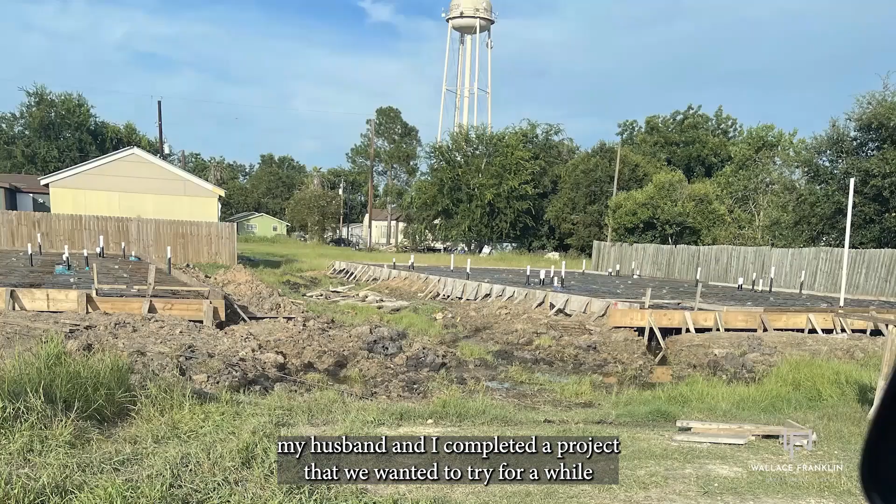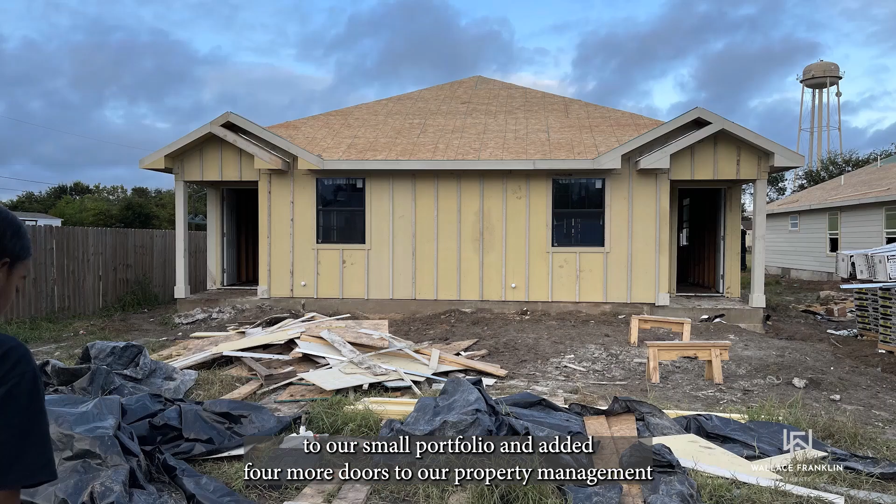In March 2022, my husband and I completed a project that we wanted to try for a while, to build rental properties from the ground up. We built 2 duplexes, and it was a great addition to our small portfolio and added 4 more doors to our property management responsibilities, something I didn't fully understand the implications of when we initiated the project, but I digress.

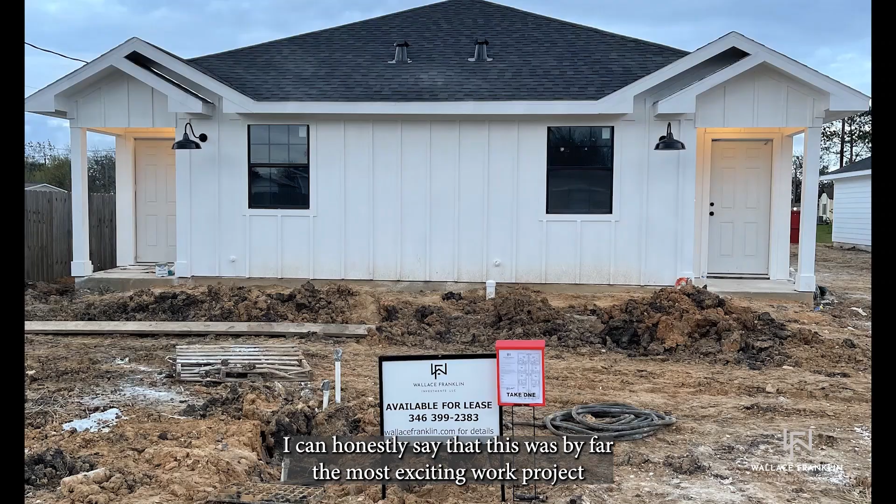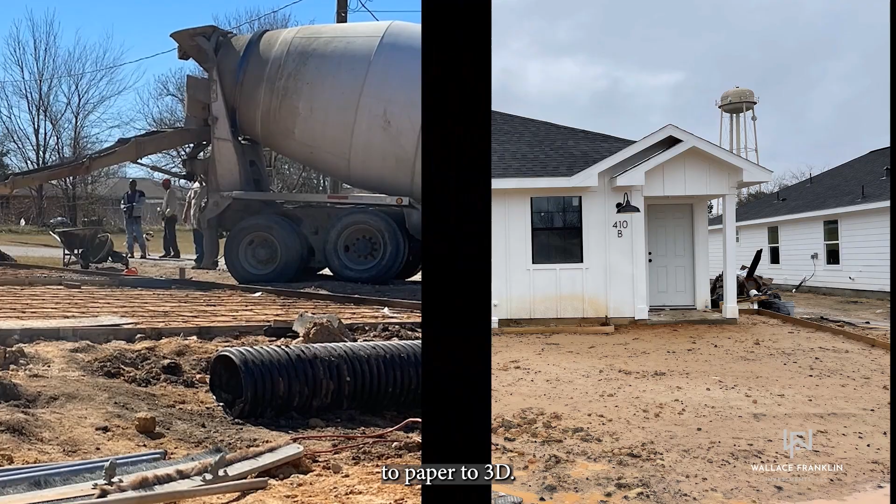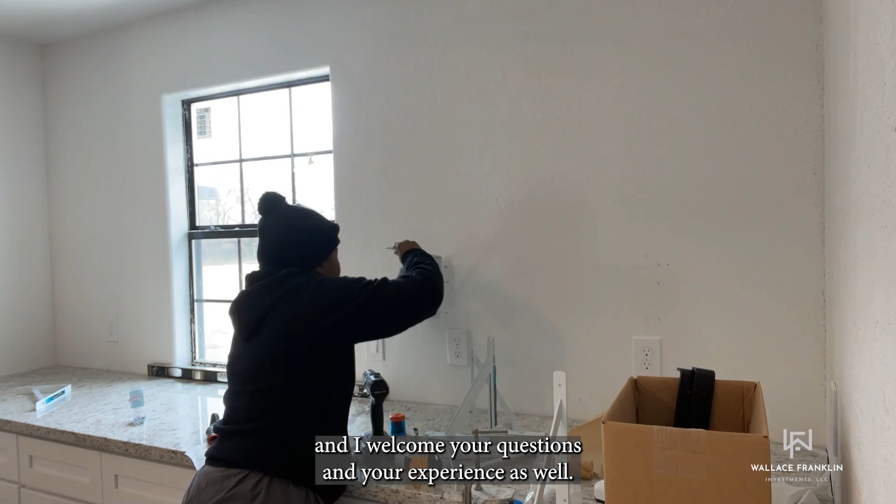I can honestly say that this was by far the most exciting work project that I'd ever had the privilege of experiencing. It is great fun to watch something go from mental concept to paper to 3D. I also enjoy working with my hands, and so I got to do a little of that too. I will share more about that journey here, and I welcome your questions and your experience as well.

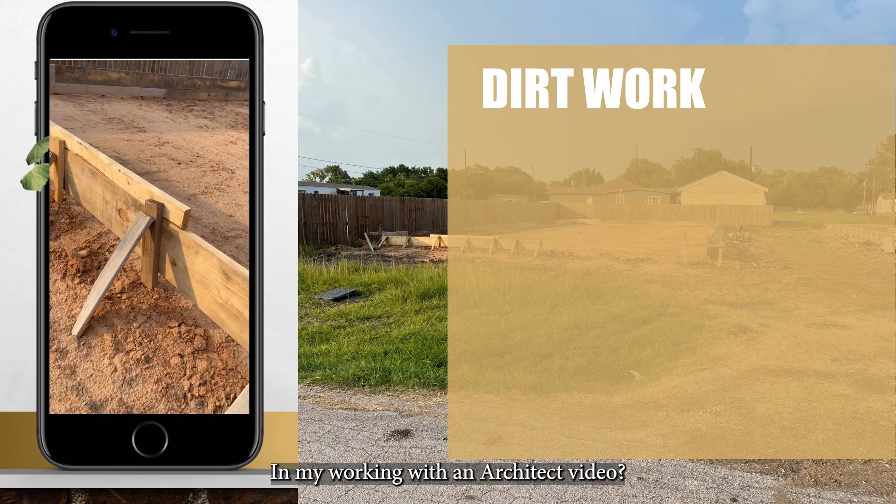The very first step in the project is dirt work. In my Working with an Architect video, you may recall that I said I did not remember nor see any reference to soil testing, and perhaps it was due to the dirt work that we did prior to beginning the foundation work. I'm going to tell you a little bit more about the types of dirt and what we did on our project.

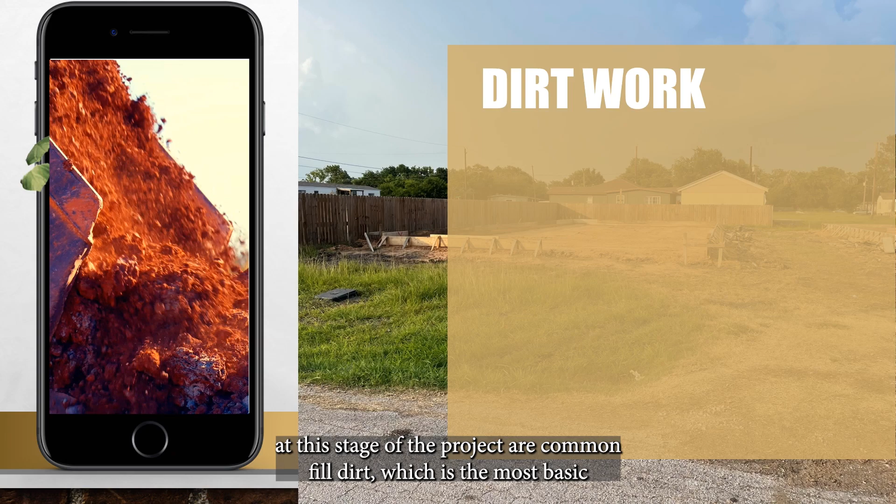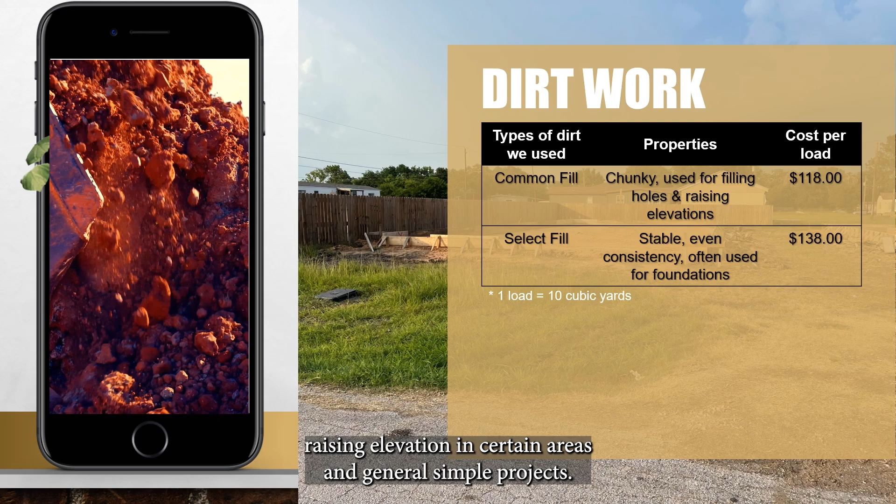There are various types of dirt, but the 2 that we used at this stage of the project are common fill dirt, which is the most basic and inexpensive dirt. It's used for filling in holes, raising elevation in certain areas, and general simple projects. It's chunky and it contains all sorts of things.

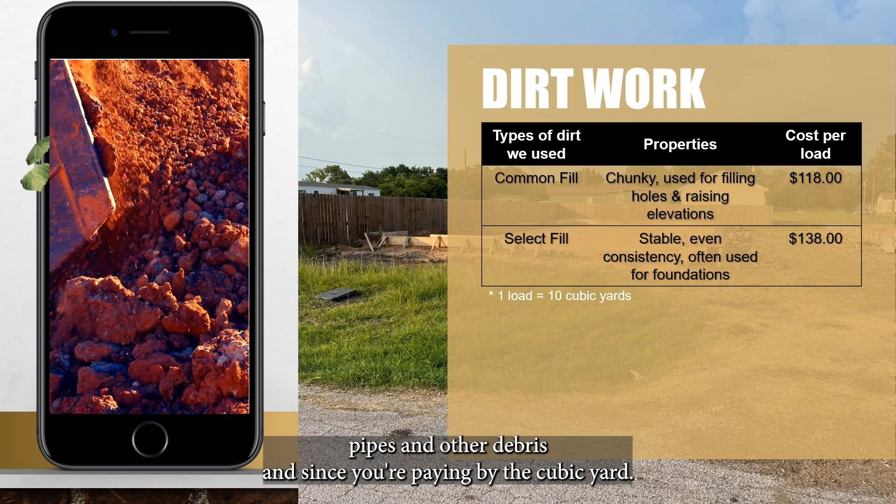I remember my general contractor remarking that you have to look at this dirt when it's being dumped because he'd seen it contain tires, pipes, and other debris. And since you're paying by the cubic yard, you don't want to pay to have debris dumped onto your project site.

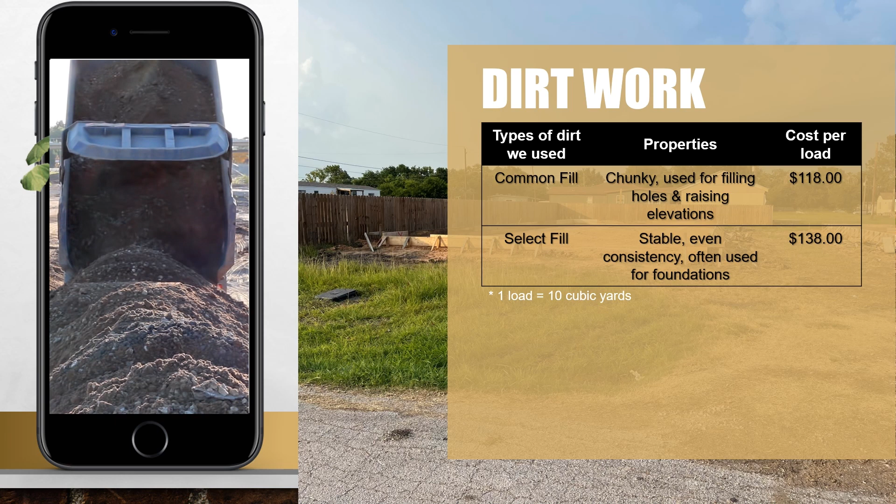Select fill dirt is higher quality. It's more uniform in its consistency and is used when creating foundations because of its stability. It's strong and less likely to shift over a long time.

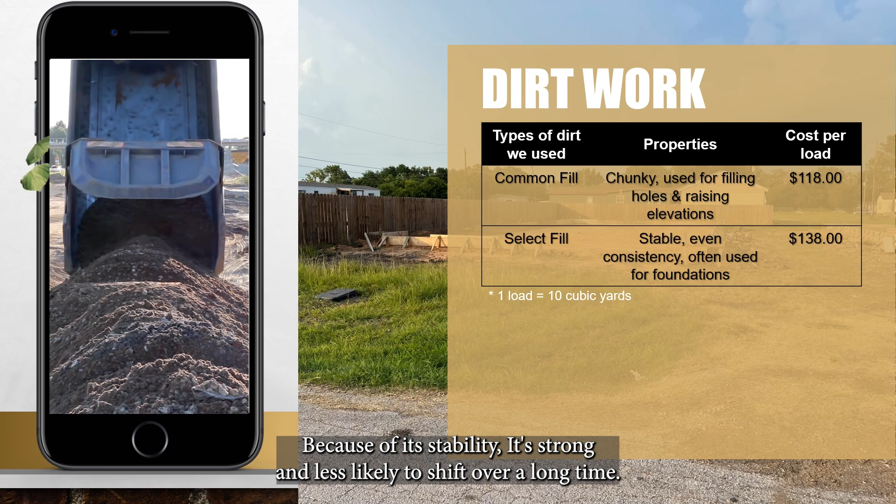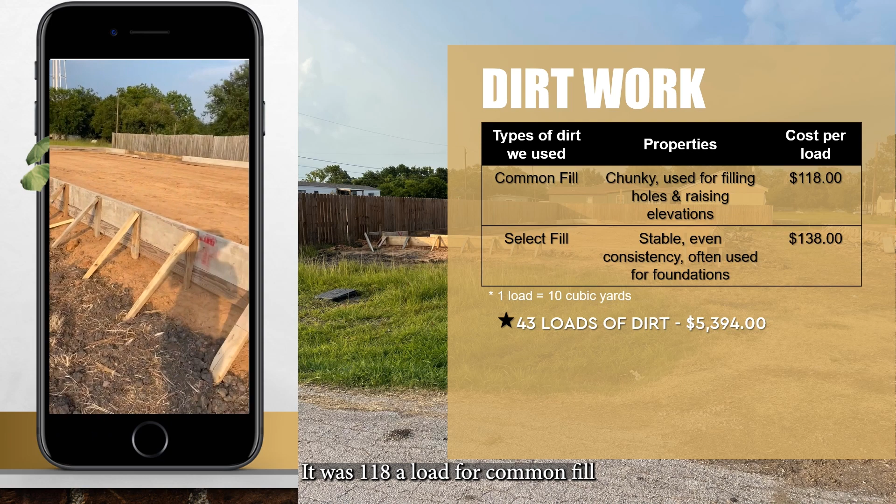We purchased 27 loads of common fill and 16 loads of select fill, and we paid a total of $5,394. It was $118 a load for common fill and $138 a load for select fill. We also had to pay someone with a bulldozer to scrape and spread the dirt once it was dumped. We paid $950 for that.

The next step before pouring cement was underground plumbing. We paid $4,000 for that. We also paid $14.04 for the poster, this metal stake, and the marker we used to make this homemade sign. You want your contractors to clearly be able to identify the project site.

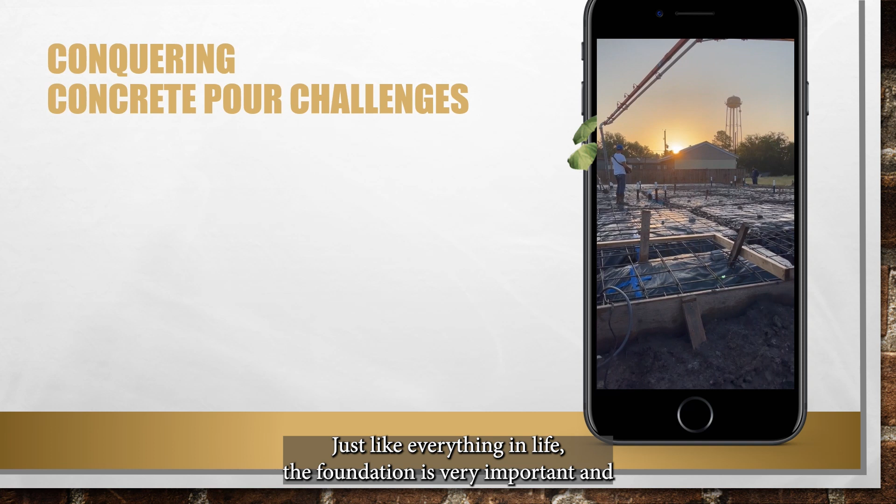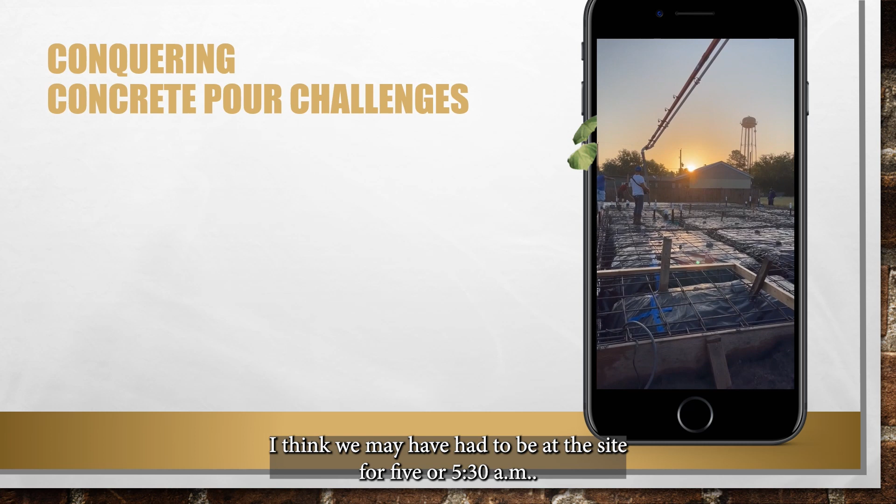So let's talk about the concrete pour. Just like everything in life, the foundation is very important, and this day was probably one of the most exciting and stressful days of the whole project. So the first thing is that we had to wake up very early in the morning. I think we may have had to be at the site for 5 or 5:30 a.m. They start very early in the morning because it allows workers a lot of time to work with the cement before the sun comes out.

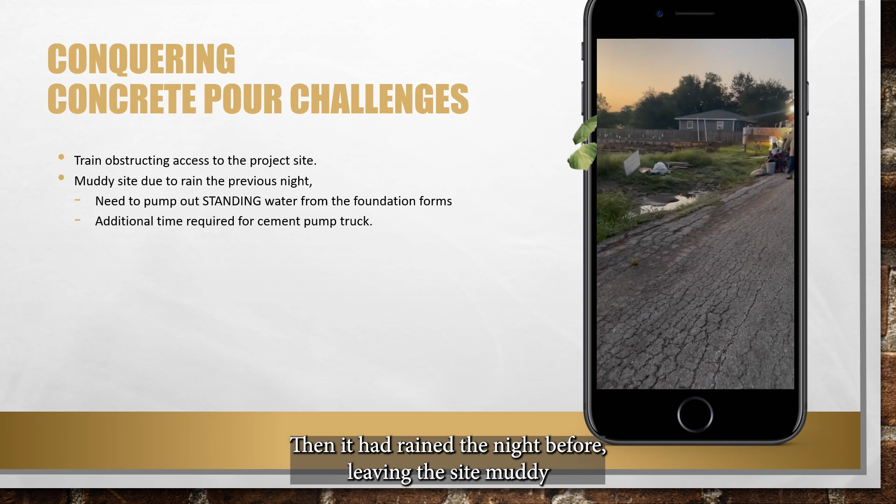We ran into issue after issue on this day. The very first being the train that had stopped at the crossing before you get to the project site. It was blocking our passage for what seemed like an eternity. Then it had rained the night before, leaving the site muddy and the foundation forms filled with standing water. Luckily, our contractor had a pump to pull some of the water out.

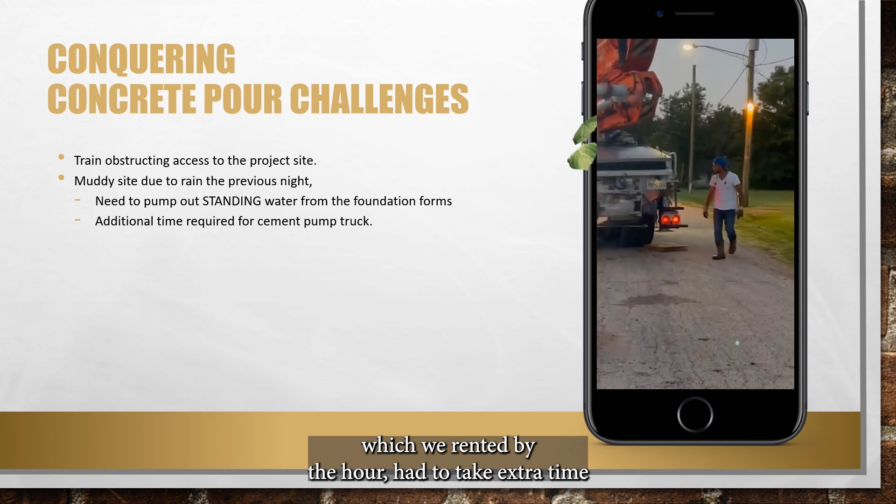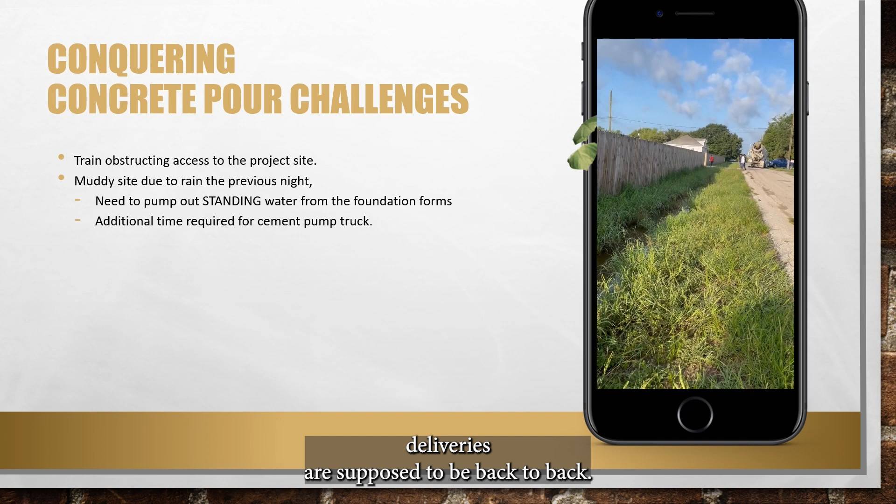But this also meant that the cement pump truck, which we rented by the hour, had to take extra time placing boards between the mud and the stabilizing feet of the truck. Now, concrete truck deliveries are supposed to be back to back. That allows all of the cement to be in place so that it doesn't start to harden.

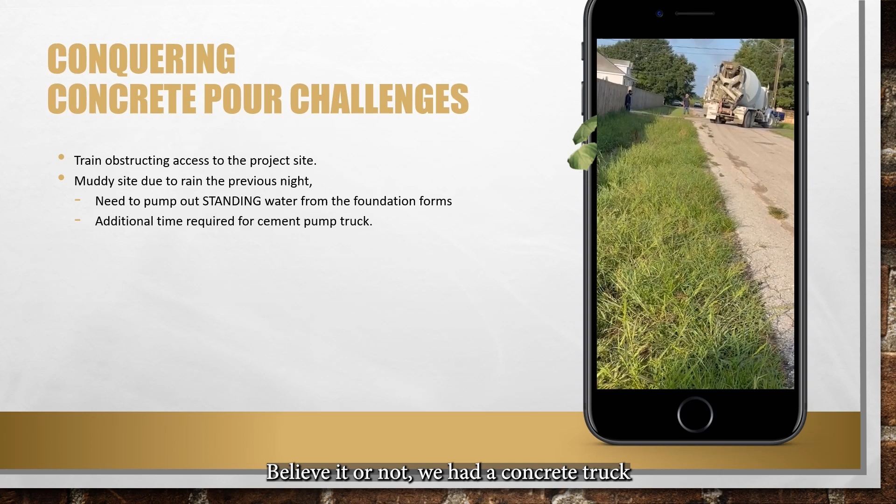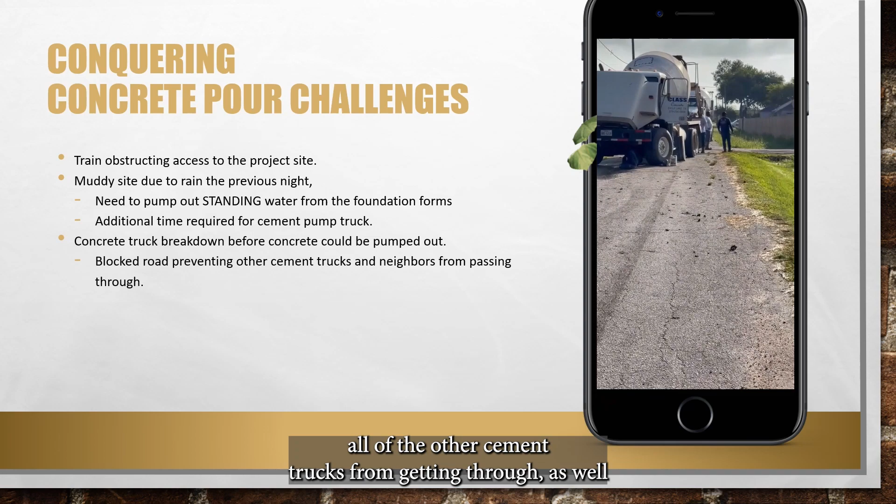Believe it or not, we had a concrete truck break down before we could get the concrete out. Not only did it break down, but where it broke down blocked all of the other cement trucks from getting through, as well as the people living in the community. They could not get in or out.

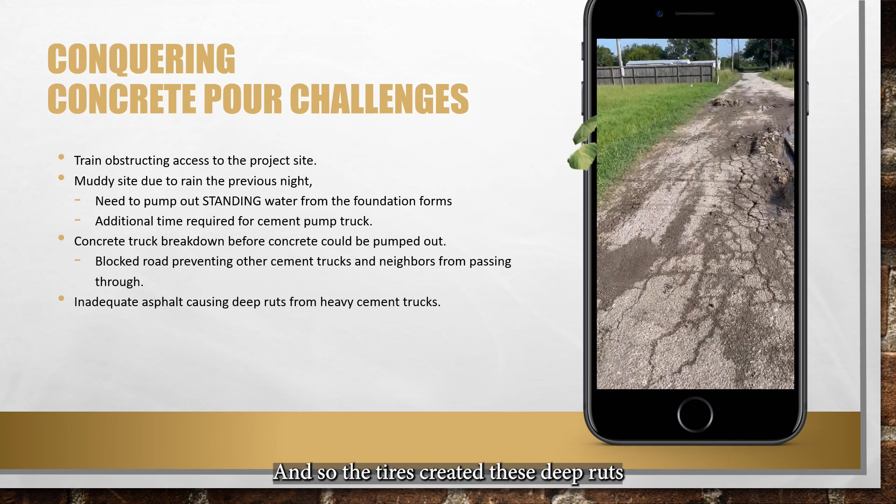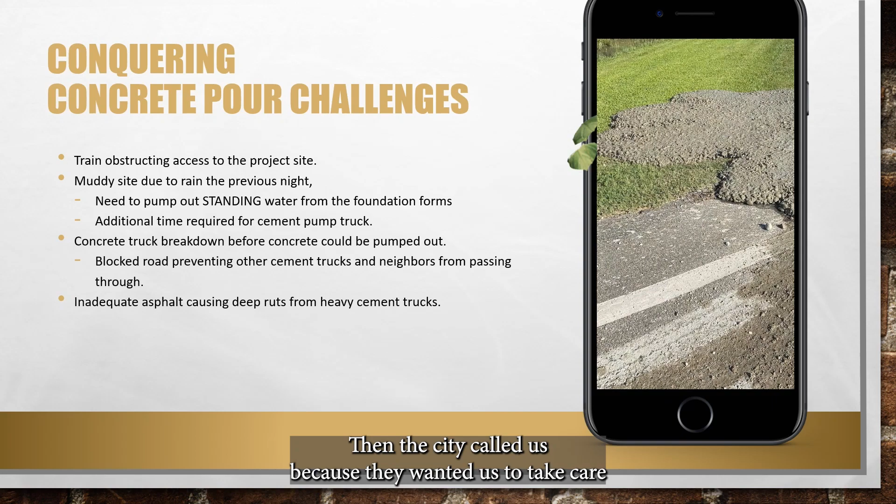Now, you might also recall me talking about the asphalt damage from a previous video, where essentially the asphalt on these narrow roads was not equipped to handle the heavy cement trucks, and so the tires created these deep ruts, which made the road undrivable for the people living on that street. Then the city called us because they wanted us to take care of a large mound of concrete that they'd found had been dropped by another concrete truck of ours.

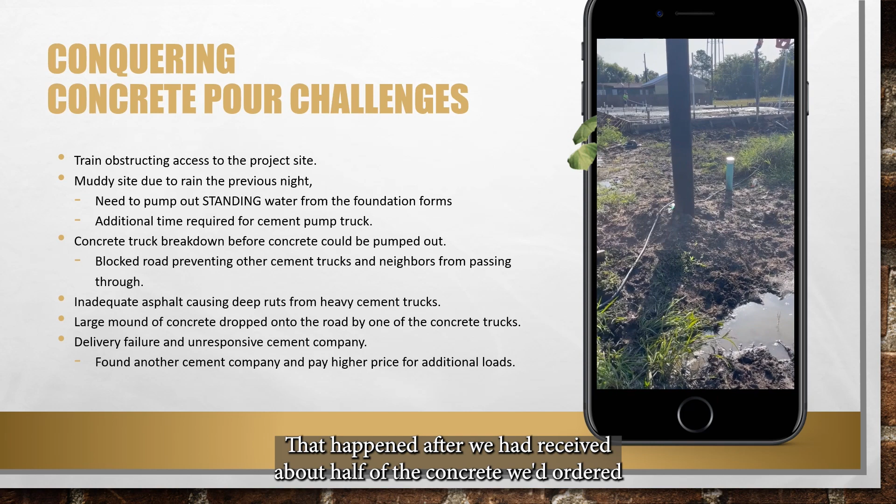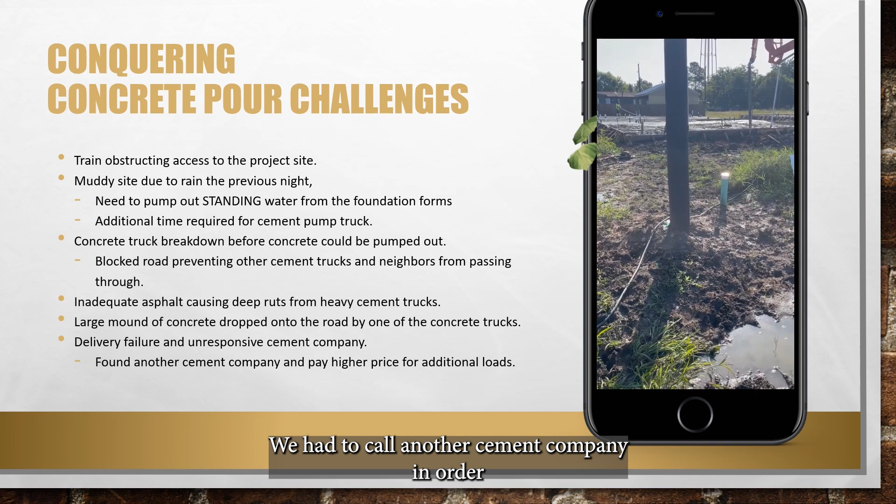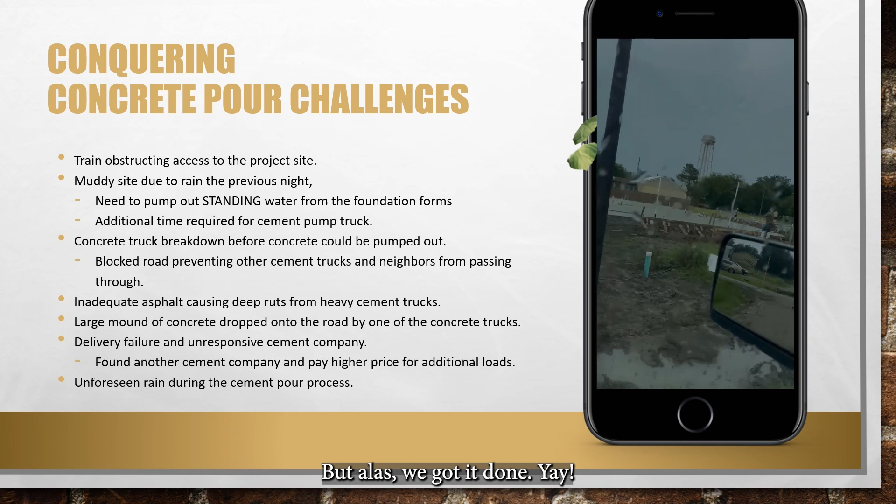But that's not all that happened. After we had received about half of the concrete we'd ordered, the trucks stopped coming and the cement company stopped answering our calls. We had to call another cement company and order the additional loads, and they were almost double the price per load. Then, if that wasn't enough, it started raining. But alas, we got it done. Yay!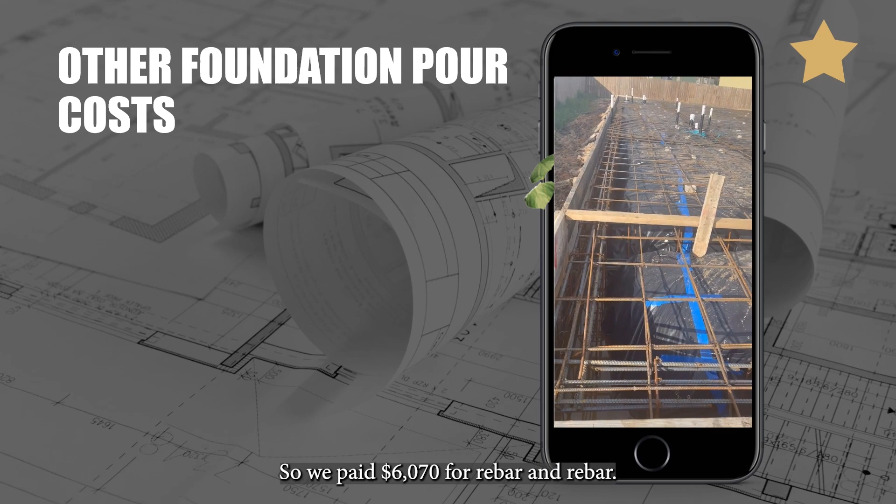Now, let me go over the cost for this. So, we paid $6,070 for rebar. And rebar is all of this metal that you see that will support the concrete for the foundation. We paid $19,766.40 for the actual concrete. Then we paid $1,600 for the concrete pump truck rental.

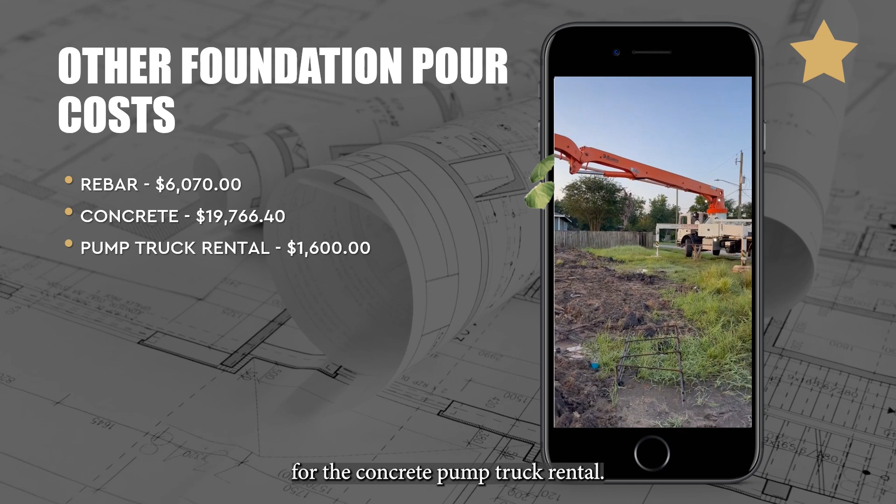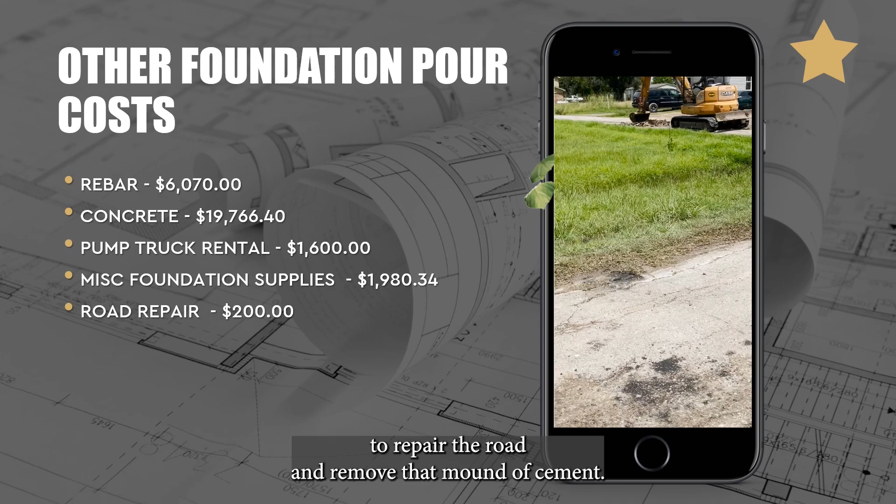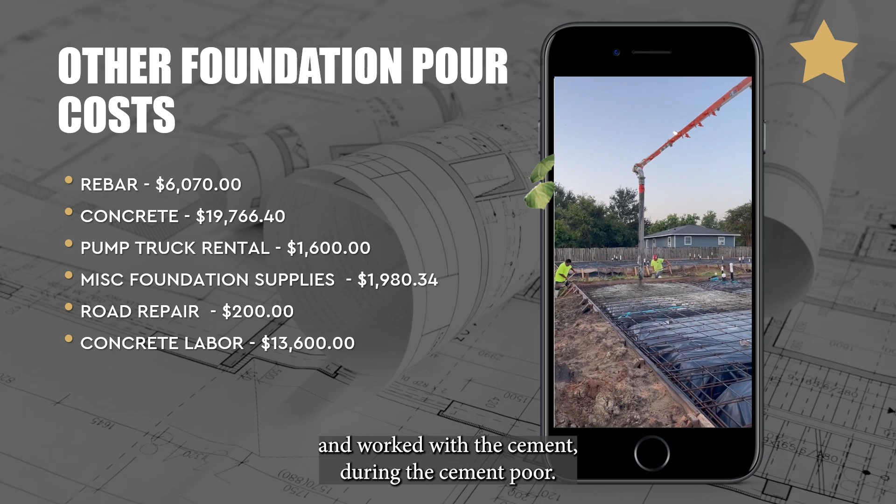We paid $1,980.34 for other foundation supplies that were required prior to pouring the concrete and after. We also paid $200 to repair the road and remove that mound of cement. We paid $13,600 for concrete labor. And these were the guys who smoothed the cement and worked with the cement during the cement pour. Other fees that we paid around this time included permitting fees.

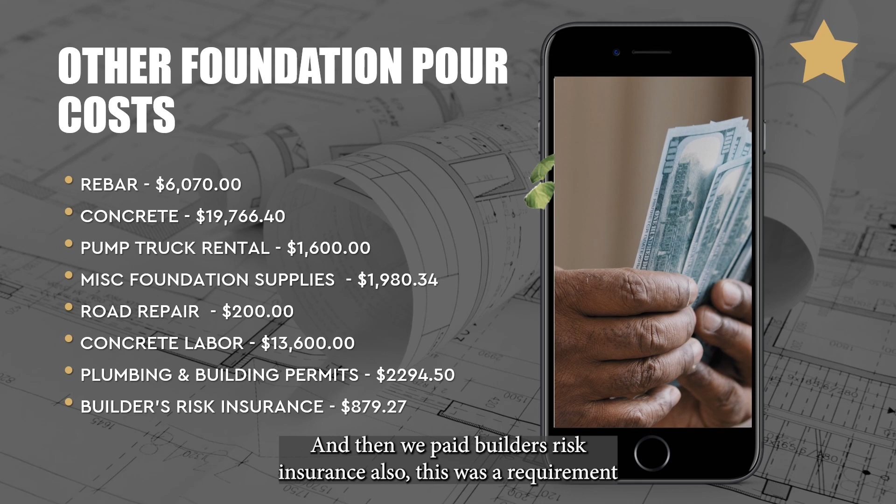We paid both plumbing and building permits, and that totaled $2,294.50. And then we paid builder's risk insurance also. This was a requirement from our lender, and the cost for that was $879.27 for a 6-month policy.

So here are my final notes as it relates to the foundation pour. The first thing that I would recommend for someone doing this is to really do some due diligence on your concrete contractor. Perhaps get personal references. We went with price, and maybe that wasn't the best thing because, as you know, they fell short on our concrete delivery and stopped answering our calls. Not to mention that one of the concrete workers told me during the pour that the cement was poor quality and not to order from them again.

The second concrete provider was better. However, when I looked at both of their Google reviews, they have similar reviews. So I don't know that Google reviews would have been the answer. I think asking other builders or other people in the building industry would work better. So that's something that I would do differently.

The next thing that I would share is simply not to be discouraged when things don't go as planned. And I guess this applies to any part of the project. You will run into challenges and things that are unexpected. And I encourage you to address them, learn from them, and move on.